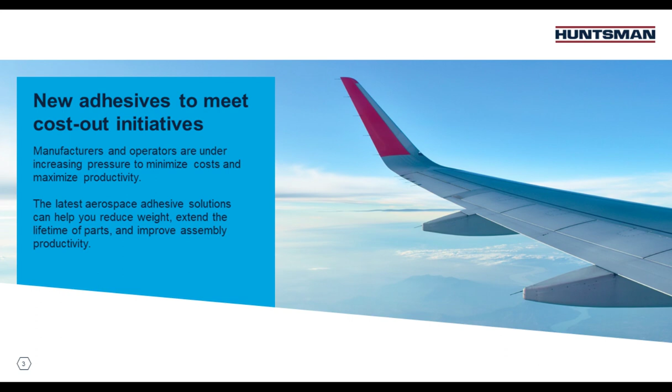The aerospace adhesives we're going to be discussing today can help you to reduce these overall cost goals. We can also improve your productivity goals by improving efficiency and throughput, and also by helping to simplify your materials inventory, all while helping reduce aircraft weight and extend part lifetimes.

We'll be discussing 3 new structural adhesives from Huntsman to help these aerospace engineers and supply chain teams to meet their challenging cost reduction demands. Our EpiBond 215, EpiBond 300, and EpiBond 200 are easier to use and offer faster handling and curing times than many currently offered products.

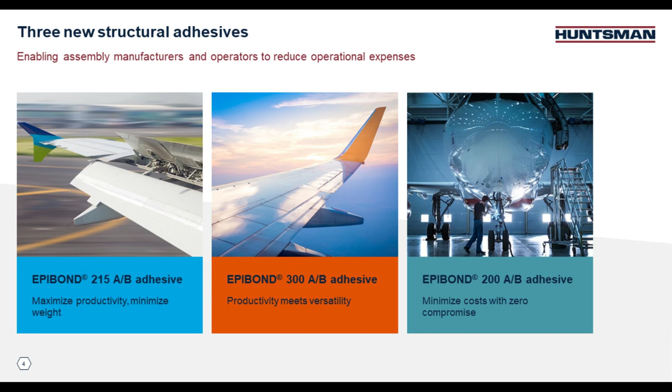So what do we do at Huntsman Advanced Materials? Well, we make things possible. Huntsman Advanced Materials serves many of the world's leading businesses across countless industries. We enable greater innovation, performance, and sustainability to engineering challenges on a global basis while contributing towards a better quality of life.

We focus on specialty resins and formulated systems, including epoxy resins, multifunctional components, adhesives, and core reinforcing materials. One of the things that makes Huntsman unique in this industry is that we actually synthesize our very own base components and building blocks as well, versus having to seek these out from other suppliers.

Huntsman's aerospace legacy dates back well over 70 years to when one of our earliest adhesives was used in the fabrication of the de Havilland Mosquito, better known as the Wooden Wonder to many of you. It was powered by 2 Rolls-Royce Merlin engines. Its innovative design made it the fastest operational aircraft in the sky in 1941. The Mossy served successfully in both bomber and fighter roles during World War II.

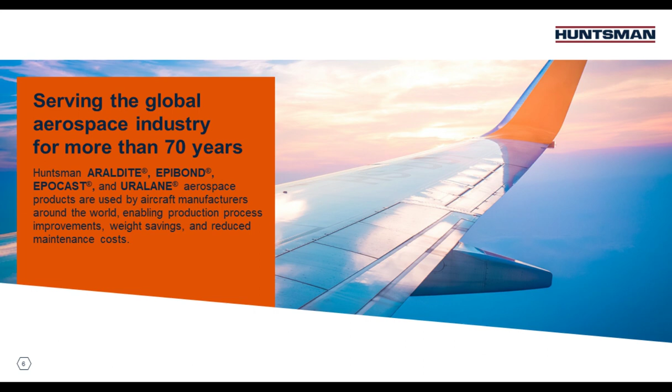From this great aviation legacy, our current aerospace brands include Araldite, EpiBond, Epocast, and Uralane. Our products are used on almost every major flying platform today. We're specified by manufacturers producing commercial airliners, general aviation, military aircraft, and spacecraft throughout the world, and we're qualified to well over 100 various OEM specifications.

In case you're not completely familiar with Huntsman Advanced Materials, I'd like to share with you that we operate production and technology facilities in the Americas, Asia, and Europe. As a global manufacturing leader, our sites are focused on quality, efficiency, and especially safety. They range from smaller facilities designed for specialty production to world-scale production plants, ensuring supply to customers with global requirements.

Our capabilities in high-performance adhesives and composites are made possible by more than 1,600 associates worldwide who help support our over 2,000 global customers with innovative, tailor-made solutions and more than 1,500 pioneering epoxy, acrylic, phenolic, and polyurethane-based polymer products.

Now, as we start to review what these new adhesives offer, I encourage you to think about your current and future designs, your current production processes, and the challenges that you're being tasked with by your management.

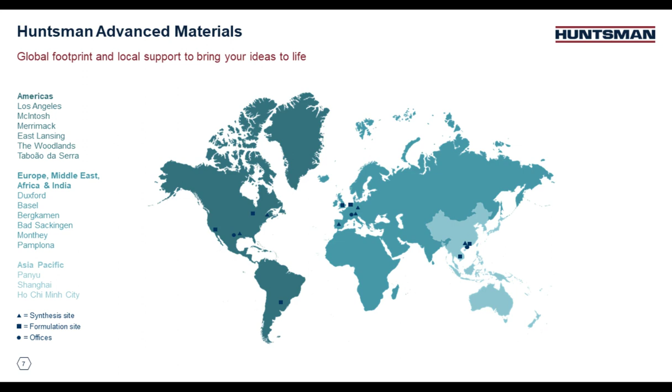Now what you've been waiting for, our first adhesive. The newest addition to our aerospace adhesives family is already under qualification by two of our customers. EpiBond 215 is the first structural adhesive we'll discuss today. Thanks to its overall mechanical performance, EpiBond 215 has up to 45% better peel, shear, and compressive strength than many competitors in this same adhesive class.

Thanks to these features, EpiBond 215 can replace up to 5 competitive adhesives and is approximately 75% lighter weight than traditional mechanical fasteners you may currently be using. This means you may be able to reduce your inventory SKUs by up to 80%.

Consider the advantages of adhesives over mechanical fasteners: they're lighter weight, there's no drilling of holes, which greatly reduces potential points of corrosion and the headache of misdrilled holes. All this means greater corrosion resistance, lighter weight, and improved production and inventory efficiencies.

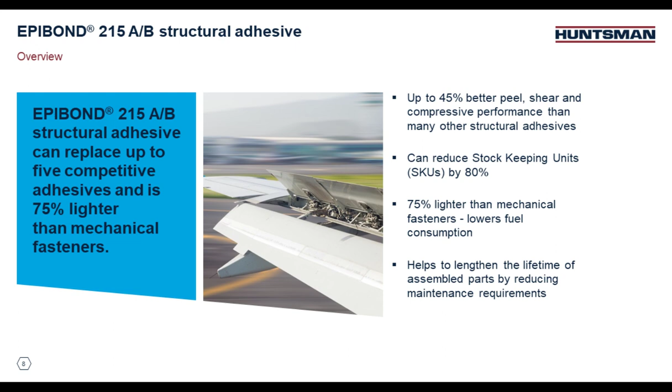Now I'll turn it over to Leah Yatarius for a more technical look at our EpiBond 215. Thanks, Todd. EpiBond 215 is ideal for bonding multiple substrates, including metals, composites, and most thermoplastics.

What you see here on the left is an overview of the performance data. The primary feature of EpiBond 215 is its exceptional peel strength. At room temperature, it gets 85 pli for roller peel and 71 pli for T-peel. Typically, adhesives with high peel suffer from reduced lap shear strength, especially at elevated temperatures. But EpiBond 215, while having high peel, also has exceptional lap shear strength at room temperature, as you can see, 5,200 psi.

It also has a wide service temp range from -90 F to 250 F. At 250 F, the lap shear strength is 2,000 psi. While most epoxy adhesives decline in performance at extremely low temperatures due to embrittlement, the lap shear strength actually improves to 5,500 psi at -90 F.

Combined with its low outgassing, this product is well suited for space applications. It also maintains good compressive strength of 7,400 psi at room temperature. As a side note, you can contact us and request any additional data not shown in this presentation. If you look to the right side, the strength build during cure is shown.

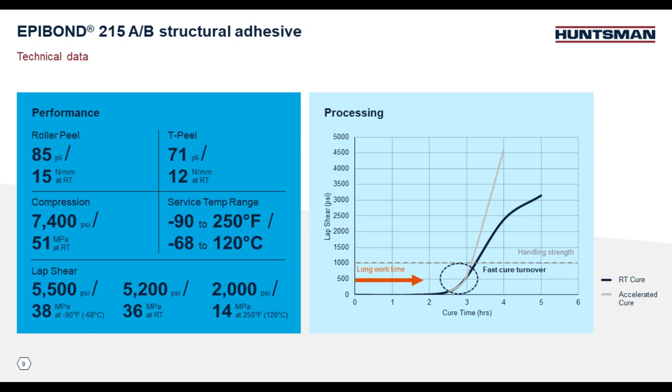Now, how can it improve productivity? The time to handling strength for several of these competitor products is 12 to 24 hours. EpiBond 215 reaches handling strength in 3 hours. So unlike the competition, EpiBond 215 will allow the part to be moved in one shift. In summary, you can have high peel, high lap shear strength, wide service temp, and improved production throughput in one product that can potentially replace several competitor products.

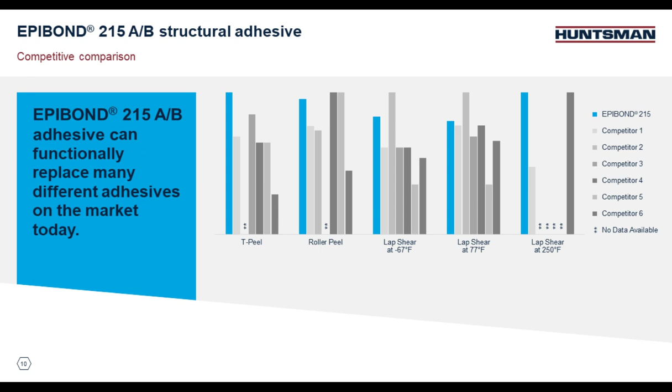Suitable applications you may want to consider EpiBond 215 for include the bonding of not only simple fixtures, brackets, mounting posts, inserts, and nut plates, but all the way up to major airframe components such as your spars, ribs, stringers, and even flight control surfaces.

Thanks to the low outgassing that Lee pointed out, it's also a great option to consider for space applications, including component and insert bonding. When we formulated EpiBond 215, it was based on extensive customer feedback.

As a result, it's capable of replacing up to 5 adhesives in the same class that are on the market today. When you're thinking about your operation, be sure to keep in mind that when multiple adhesives are used in the same assembly, both production time and inventory complexities can grow significantly, along with product application, EHS, and training requirements. So why make operations more complicated than they need to be?

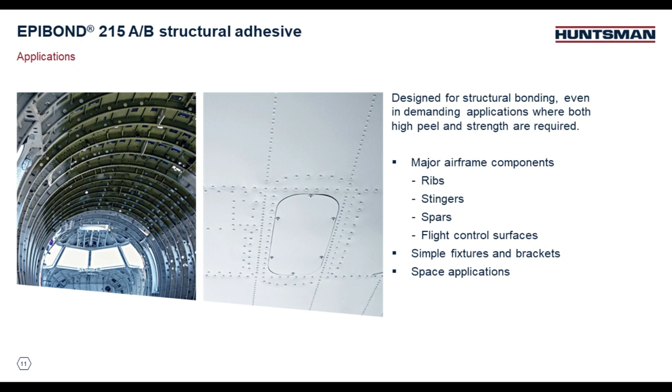Straightforward, EpiBond 215 is a high-performance structural adhesive with exceptional peel strength and shear strength across a wide variety of temperatures.

Next up, one of my also favorite adhesives, EpiBond 300. EpiBond 300 is a very versatile and impressive structural adhesive, and it can actually improve your production throughput by up to 80%. EpiBond 300 features an up to 80% quicker time to handling strength and even an 88% faster cure time.

What this means is that depending on the size of your application and your part assembly, your operations could be completed and moved within a single shift and a fully cured part produced within 1 day.

EpiBond 300 offers high compressive strength along with high service temperature. It thus enables it to be a very suitable candidate for use in liquid shim applications where you may currently use metal shims.

With EpiBond 300's high elevated temperature performance, improved handling and flexible cure times and cycles, it's better than many products currently in the market today.

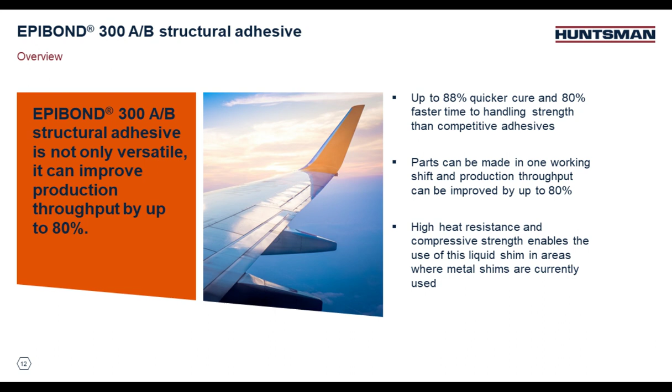So be sure to note the differences that Lee is going to point out to you about how this material handles, its compressive strength compared to older products on the market, and also its impressive peel strength. So Lee, if you could share some technical information with us.

EpiBond 300 is ideal for high volume production for applications requiring high strength at elevated temperatures. The primary feature is exceptional mechanical properties and strength retention of those properties at high temperatures. On the left, we're showing compressive strength and lap shear strength values at room temperature and elevated temperatures.

It's very strong in compression, giving 11,000 psi at room temperature and 9,000 psi at 250 F. Another additional benefit is the compressive failure mode. I've personally observed that EpiBond 300 will not shatter when it fails, unlike the competitor product.

For lap shear strength, it gives 4,200 psi at room temperature, 3,100 psi at 250 F, and it retains 1,100 psi at 400 F. That is outstanding adhesive performance.

EpiBond 300 also cures at room temperature. If you look at the right side, you can see that the handling time at room temperature is slightly over 4 hours, which enables completion of assembly within one shift.

And, as indicated by the circle, it will achieve 85% cure in only 6.5 hours. If you want to speed things up, 1 hour at 150 F will give a full cure.

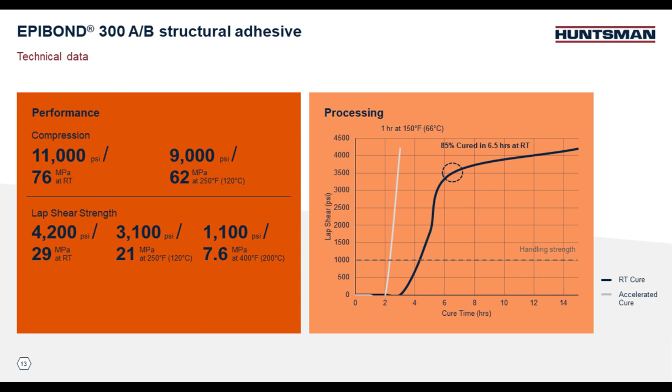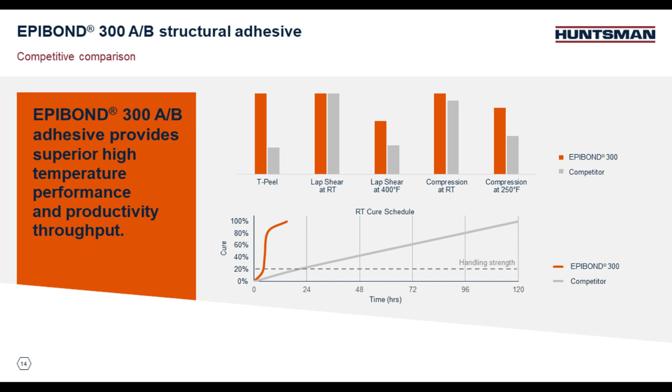Yet, in under 24 hours at room temperature, EpiBond 300 will achieve full strength. The competitor will take up to 5 days. So, in addition to high performance, this product offers increased productivity.

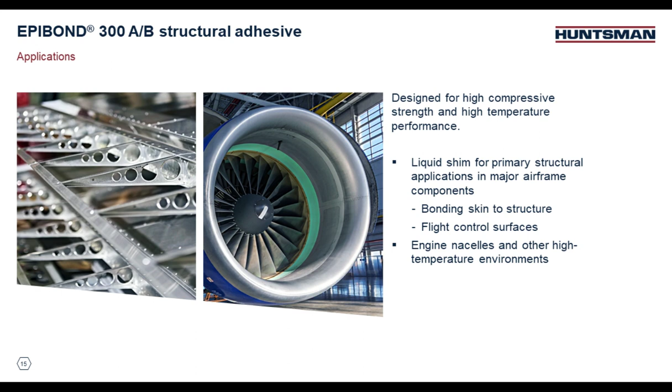Next up, one of my absolute favorite adhesives that we're introducing: EpiBond 200. EpiBond 200's structural adhesive faster time to handling strength can increase your throughput by up to 50%. This could allow your parts to be completed in one shift. It's very flexible, very tough, yet offers high shear and good performance across a wide temperature range.

One of the many things I like about the very versatile EpiBond 200 is how well it flows and wets out, yet it's also non-sag, which allows it to be applied vertically or overhead. This means the shop wouldn't have to rotate the tooling jig or the part during production. Adding to the list is the simplistic mix ratio - it's very straightforward, either 1-to-1 by weight or volume. Again, this speaks to its shop-friendly handling characteristics. Also, in areas where the bond line may be exposed to dust or FOD in the shop, the faster tack-free time reduces the potential for contamination.

So back to Lee one more time for a technical review of EpiBond 200.

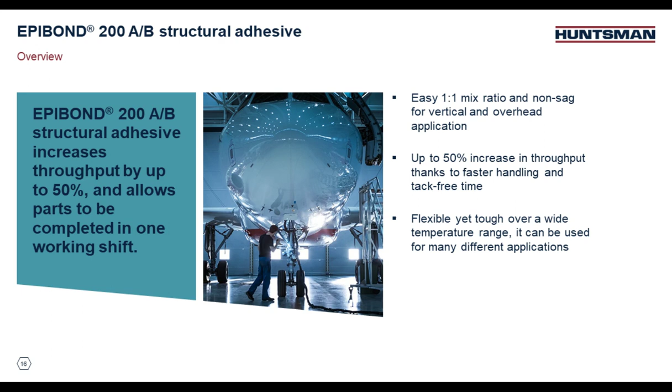EpiBond 200 gives good performance at low temperatures as well. Typical competitive products either become too brittle or do not have good strength retention at lower temperatures. But EpiBond 200 has a lap shear strength of over 3,100 psi at negative 67 F.

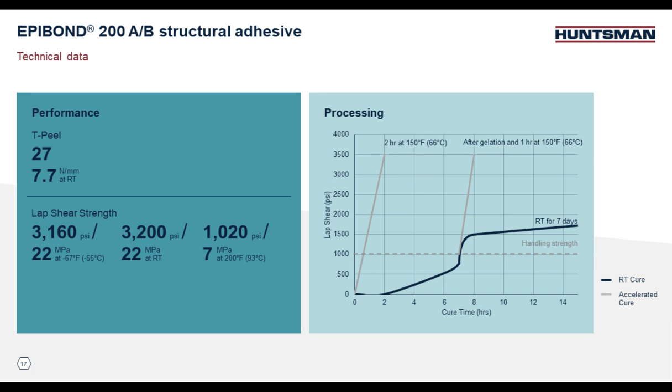As far as processing goes, it's easy to mix and dispense and has a 60 to 70 minute working time. It will be FOD tack-free in 5 to 8 hours at room temperature and reaches handling strength in 6 to 8 hours at room temperature. It will be fully cured in 7 days at room temperature, or it can be accelerated for 2 hours at 150 F after application, or only 1 hour at 150 F after it reaches handling strength.

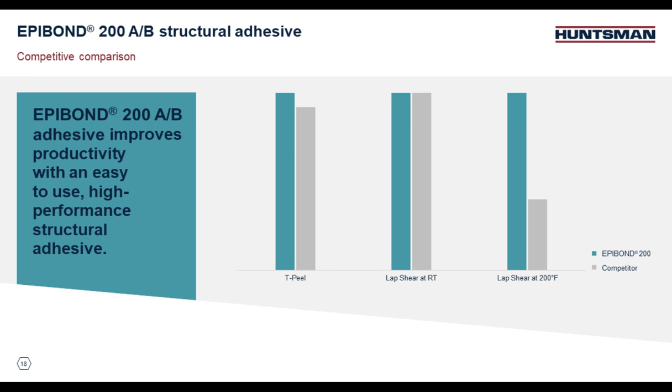Thanks, Lee. I appreciate the excellent insight. As you can see from what Lee pointed out, EpiBond 200 is certainly a good candidate for a very broad range of applications such as fixture mounting, insert potting, nut plate and component bonding, and also for high fatigue applications and even edge sealing of areas such as CFRP and other composite materials where you may want greater strength and durability beyond what simple sealants may offer.

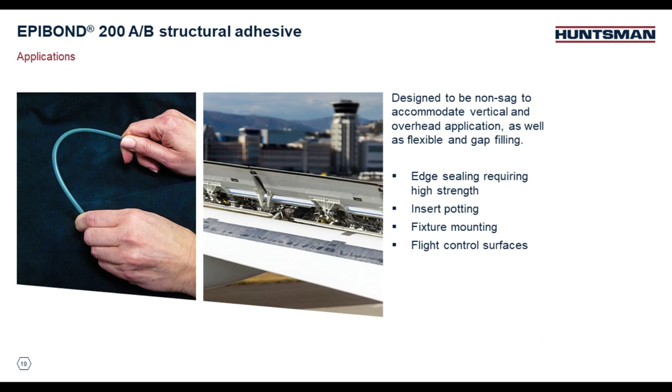EpiBond 200 is a very versatile, flexible, and high-performance structural adhesive to consider. It's going to help you improve productivity. It's non-sag. Its elevated temperature performance and improved cure schedule are all user-friendly and design-friendly attributes. So, in summary, Huntsman's EpiBond structural adhesive line offers improved performance across a wide variety of demanding ranges in aerospace applications. The 3 products we presented today will help the aerospace supply chain meet the demanding and challenging cost reduction that we're faced with in our industry.

Our easier to use, faster curing products enable our aerospace customers to reduce their overall production cost and improve productivity and throughput. EpiBond 215 is a high-performance structural adhesive designed for high peel and shear applications like primary structural bonding. It can also replace many currently competitive products and replace the use of mechanical fasteners as well.

EpiBond 300, with its exceptional compressive performance and strength at higher temperatures, is ideally suited for applications such as liquid shim and other structural adhesive applications, while also providing significant improvements in your productivity and your throughput.

Finally, EpiBond 200 enables easier application and improved throughput for a variety of applications. Its excellent mechanical performance, flexibility, and toughness make it ideal for fixture mounting, insert potting, edge sealing, and other demanding structural applications with vibration and repetitive loads, such as flight control surfaces.

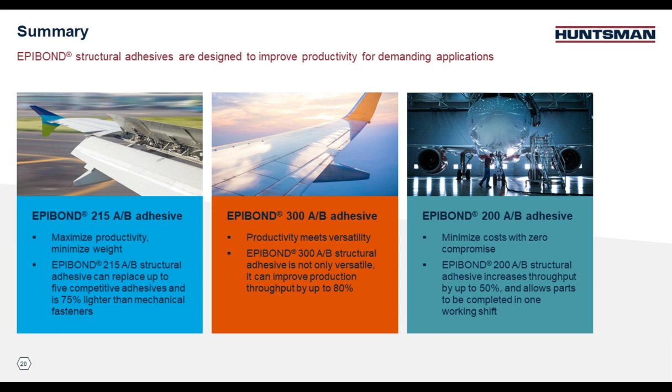So as we share this information with you today, I hope you thought about some of the specifics of your unique application, your needs, your wants, your concerns, and your future plans. Please reach out to us if you think we can help, or even if you only have a simple question. Remember, we make things possible.